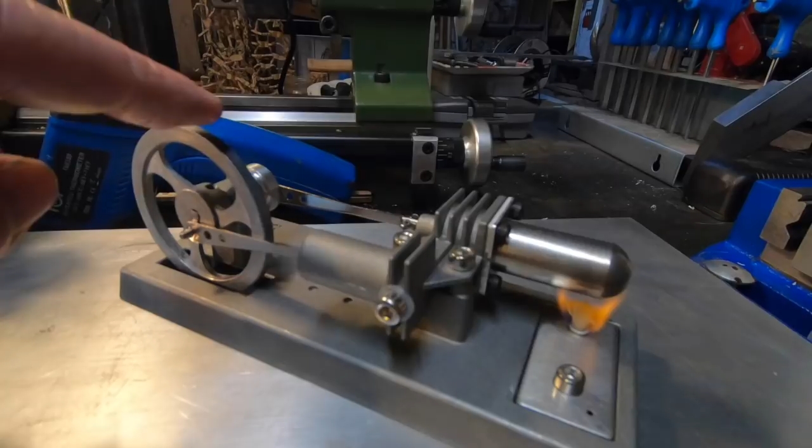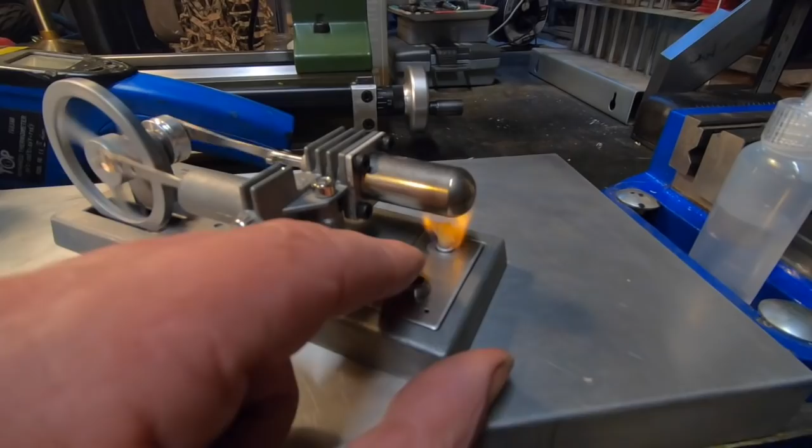Welcome back. This is a Chinese heat engine, or a Stirling engine. It's alive! It's alive! Oh, that's great! Named after a Scottish minister who tried to protect his congregation by building a safer engine than a steam engine.

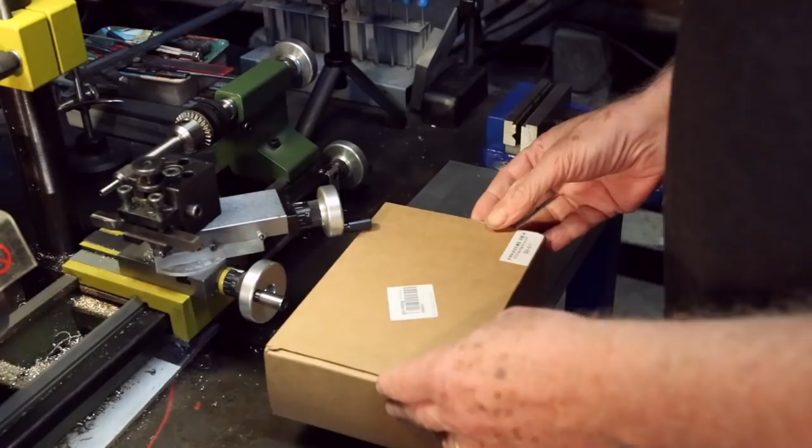Hi and welcome back. I've always wanted to build a mechanical model, a steam engine, but the Stuart models are very expensive, and I really don't feel that I've got the skill with my lathe and hand tools to actually produce a decent model. I'd end up buying two of them and probably just making one. But this looks pretty easy. This is a Stirling model engine from China and costs under £30, and is all cast and no machining is necessary. So I thought we'd build it.

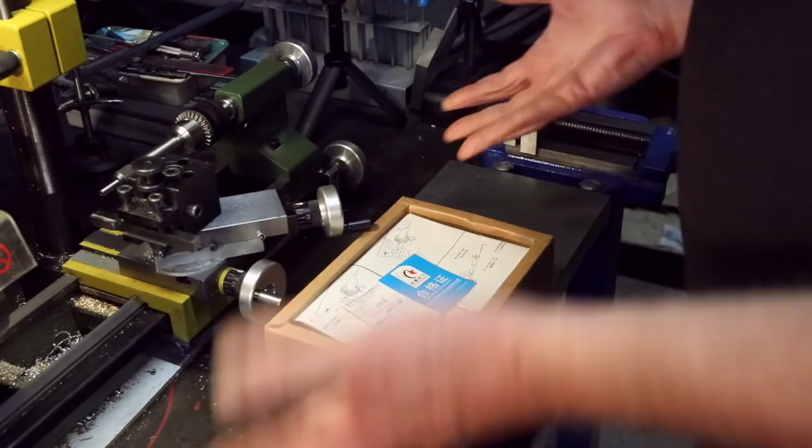Comes in a box, quality control, some pretty interesting instructions, and the parts.

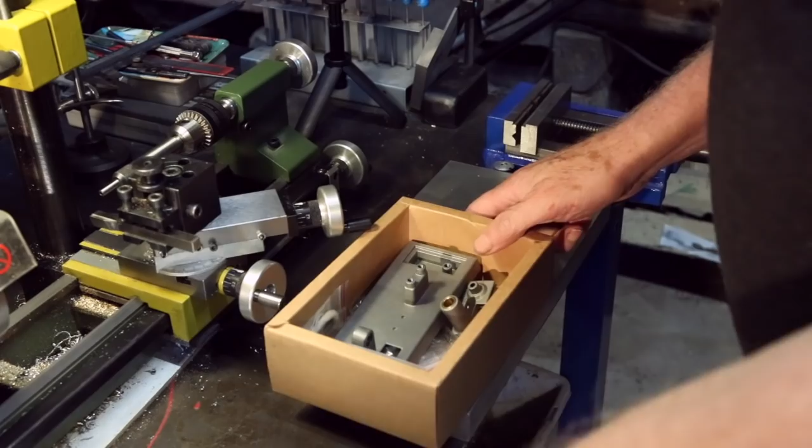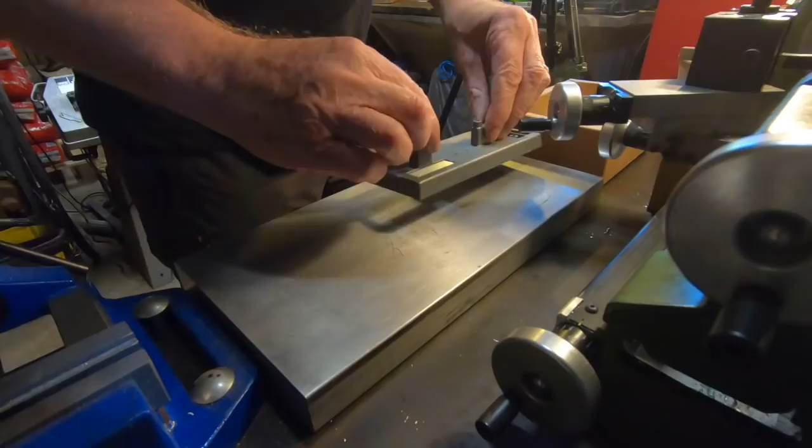Now, my first impression is these parts are really well made. These are castings, some kind of alloy. They feel a bit like cast iron, and they're really pretty straight. Flywheel.

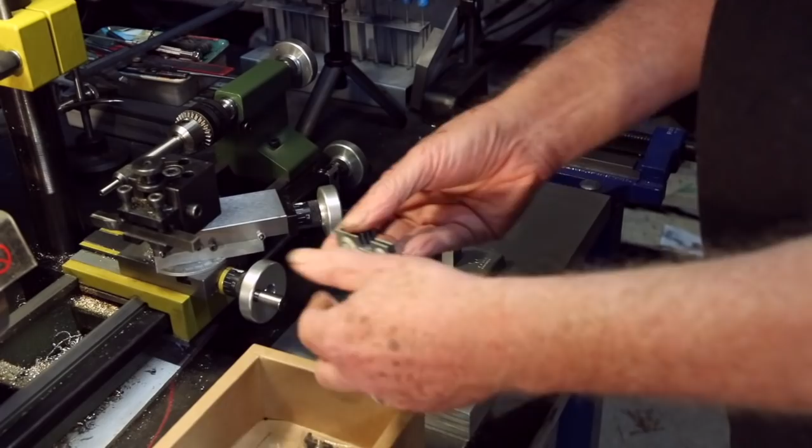A very nice cast cylinder. You can see there, somebody's put that together. It's drilled between. So this is a Stirling engine, so there's a hot side, and this is a heat sink for the second piston. So hot air expands, goes through, and then contracts, and hopefully we'll get a working engine.

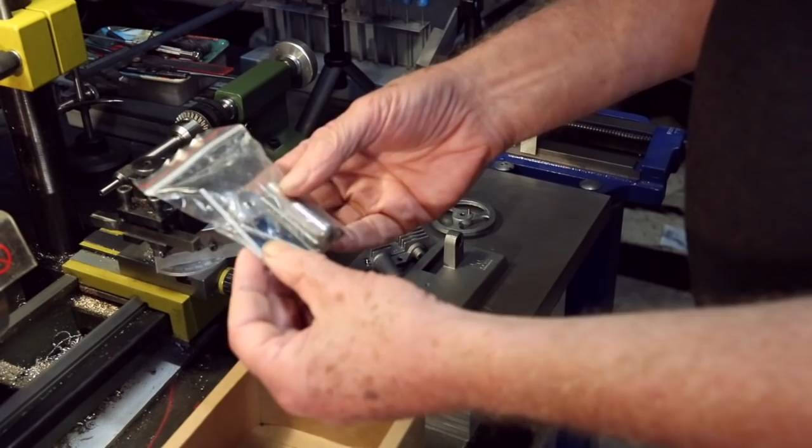A little container for the fuel when we get to that, and bags of bits. Whoa, all seem nicely made. Some Allen keys as well to put it together. Great.

This looks like the bearing. Good. A selection of Allen cap head screws. Good. This must be the piston, and it has a connecting rod in it. Yeah, it looks nicely made.

And what's this? Oh, a bag of spare parts. Excellent. And oh, one more thing that I hadn't originally noticed. Oh, look at that. That's a wick, some kind of silicone seal, and lots of little plastic spacers and gaskets. Very good.

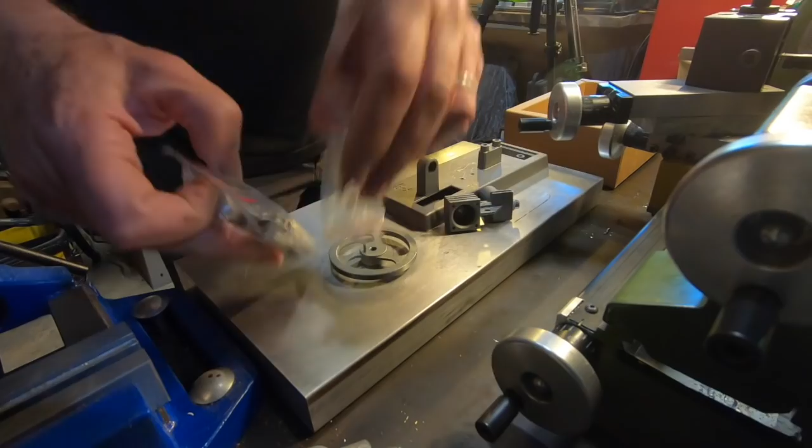So I think what I'll do is I'll put everything back in the box, and I guess we start with the base and the instructions, and we can sit down and build it together.

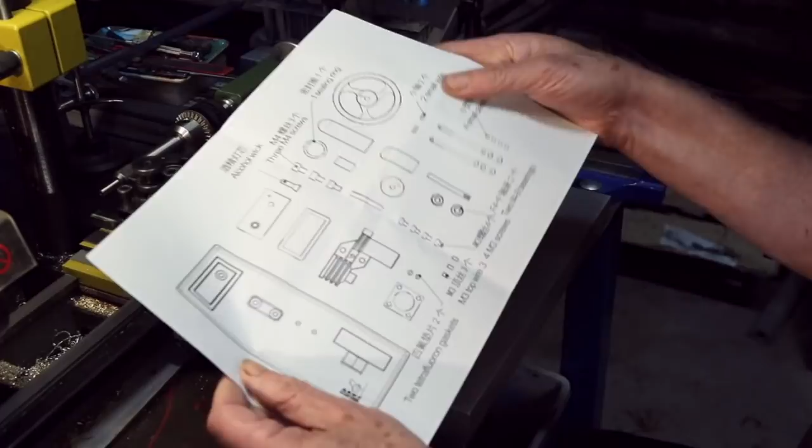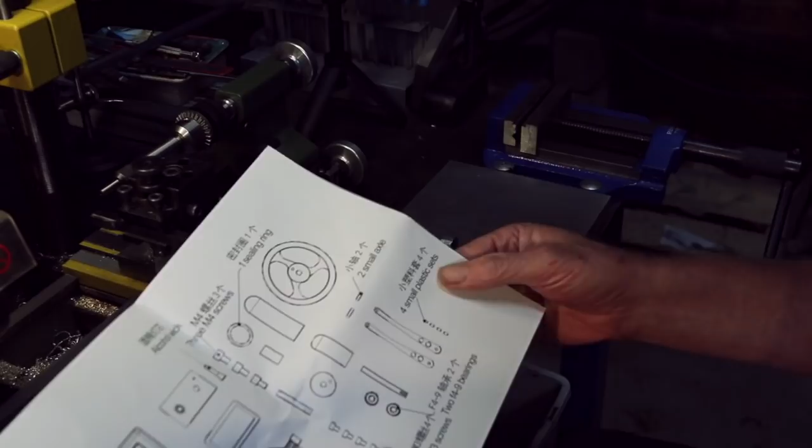So here's the parts list. 2 tetrafluoron gaskets - well, I think I saw things like that. A mystery part, M3 top wire 3, no idea what those are. 4 M3 screws, I can guess what they are. 2 F4-9 bearings, no idea. 4 small plastic sets, a small axle, a sealing ring. Must be the flywheel. Must be the cylinder and piston and connecting rod, an alcohol wick, yeah, we saw that, and the base.

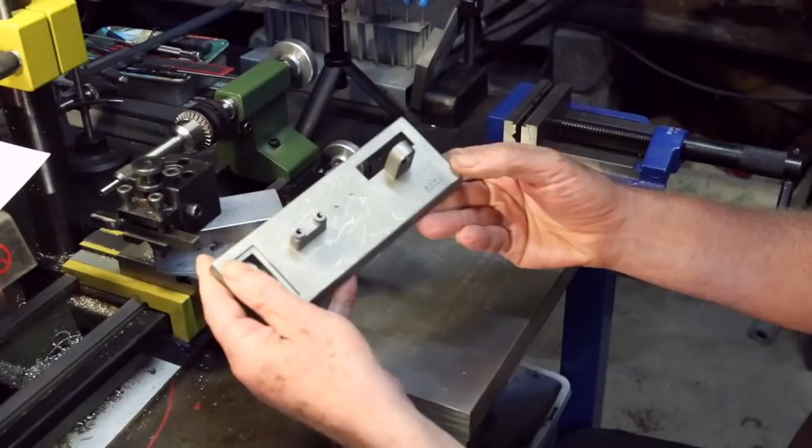So this whole thing is made by Star Power. Let me put my instructions up there, and you can see here it says Star Power, and there's a star and a crescent moon and a wing cast into this nicely made base.

I don't think I'm going to paint this. I quite like this kind of gunmetal grey finish. As I said, this is my surface plate.

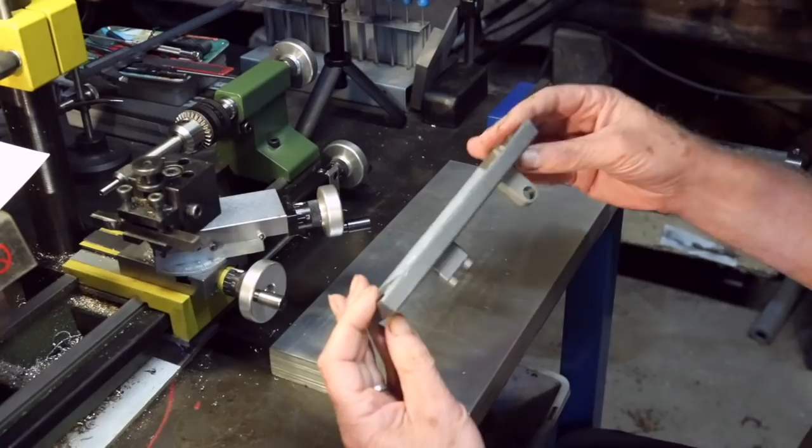It's not perfect. Maybe I'll give that a bit of a rub down. See if I can get that. It feels pretty good. It hasn't been, as I said, these castings haven't been machined. They look like they're just straight out of a cast, and that bearing surface has been reamed, and it's all been tapped and threaded. That one's not really in the center. See if that matters.

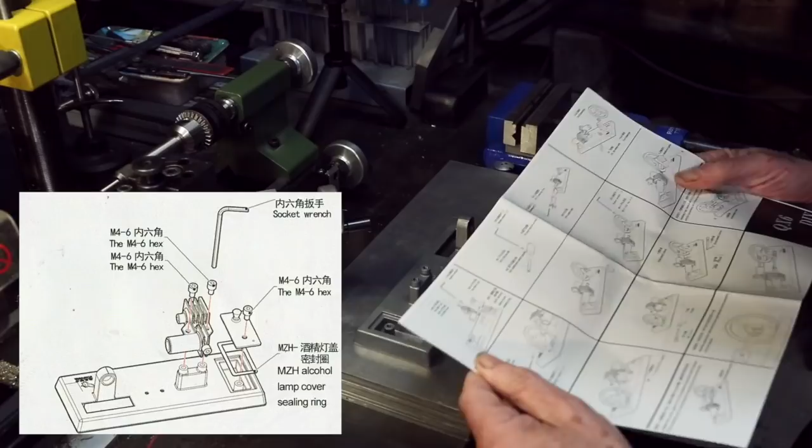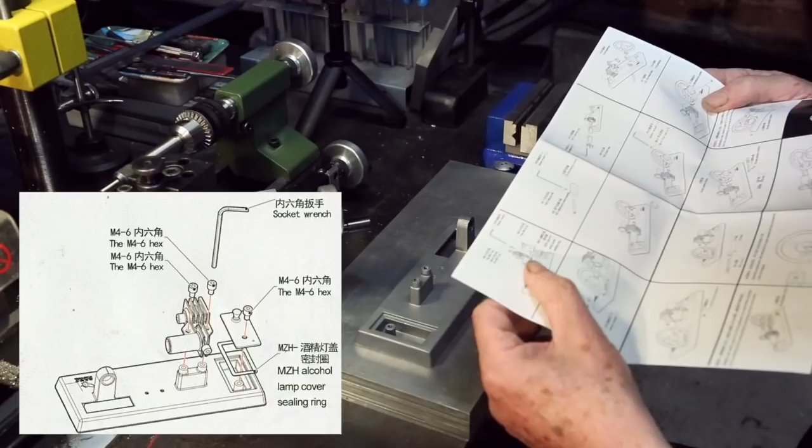All right, let's dig in and build it. Haha. Step one looks like you build the fuel tank for alcohol, and it looks like you put a seal in it, and the wick, and an M4 - it says M46 hex bolt. It'd be good if there was a picture of the finished thing. No, there isn't. Anyway, I think we can find these bits in here.

See what we have in this little bag. That really looks like the top of the fuel cover, and it has some plastic on the back. I wonder if - I think you're supposed to take it off. Okay, so that's interesting. So I think this is the top like this, and they've kind of polished it and put this protective blue film on to protect it. Wick, mounting screw, and a little air hole.

Okay, that's good. Now somewhere - oh yeah, I saw the wick and the fuel tank gasket. I guess let's take them out. Ooh, this looks like it could be quite tricky. The wick and a very thin gaskety thingy. Ooh, it's stuck to the plastic bag because it's silicone and it's sticky.

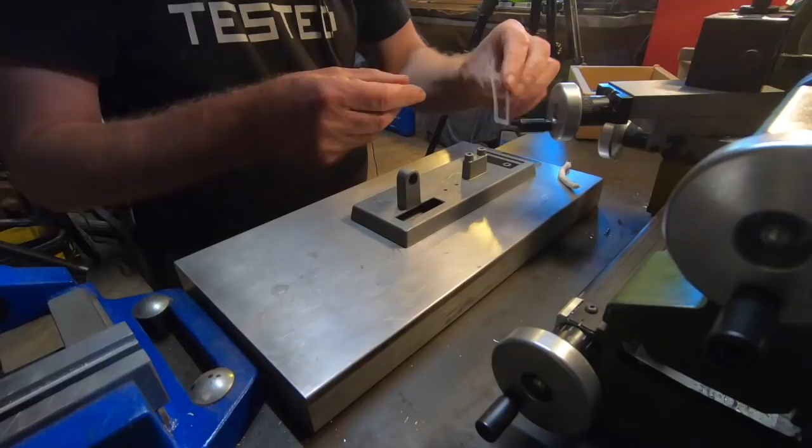How am I going to get this out? There, maybe that's it. Dun dun dun. Is it going to come out? But the thing is, if it comes out, is it going to throw all the other little silicone parts everywhere? I think the answer is yes. No, okay good. So there's a very thin silicone gasket, which it seems to imply goes in there.

This is the wick. So let me try and force it through there. No, I'm not doing so well with this. I've tried to make like a conical end. Oh yeah, there you go. Right, and the wick's going to go down there, and we need a screw.

Here's my bag of screws. I'm guessing, only guessing, that it's going to use a silver one.

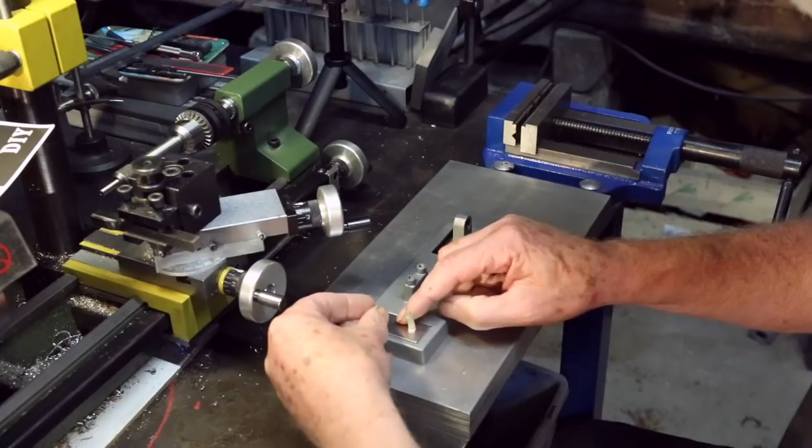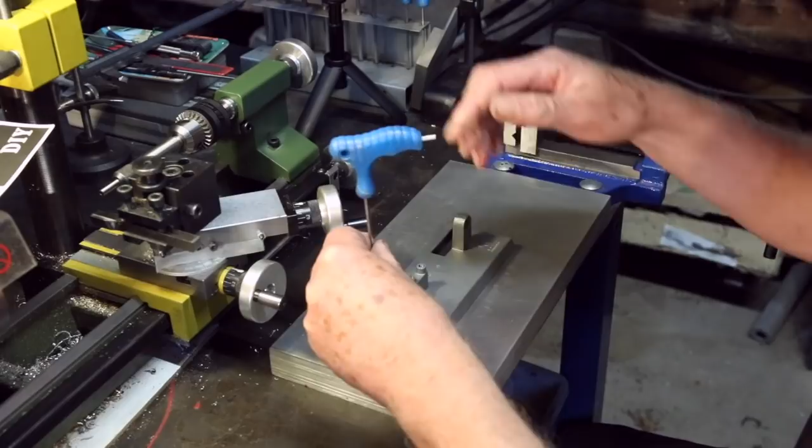We can try and see if it fits. Not sure. Okay, let me try with this one - yeah, that fits nicely, and just snug. I guess that completes the fuel tank. I guess you undo that to put more fuel in it. I'll leave this Allen key out.

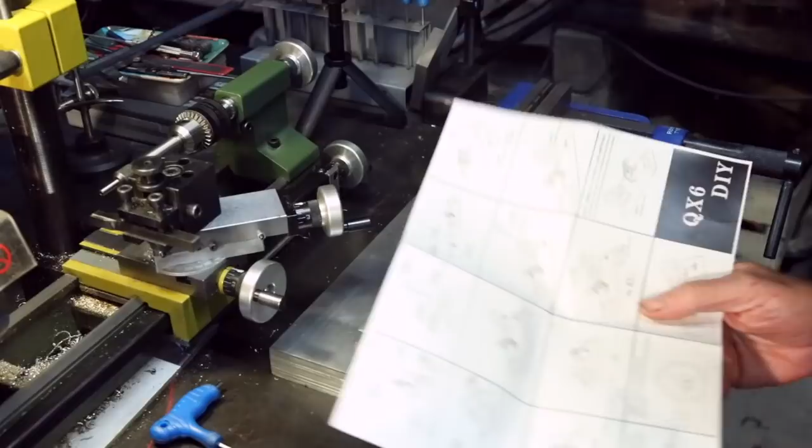Second step is to put the - oh, let's orientate this so it's the same as the drawing. So it's orientated like that.

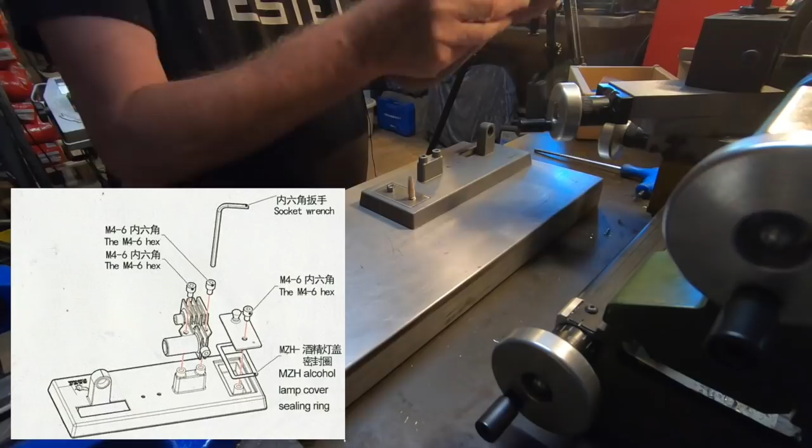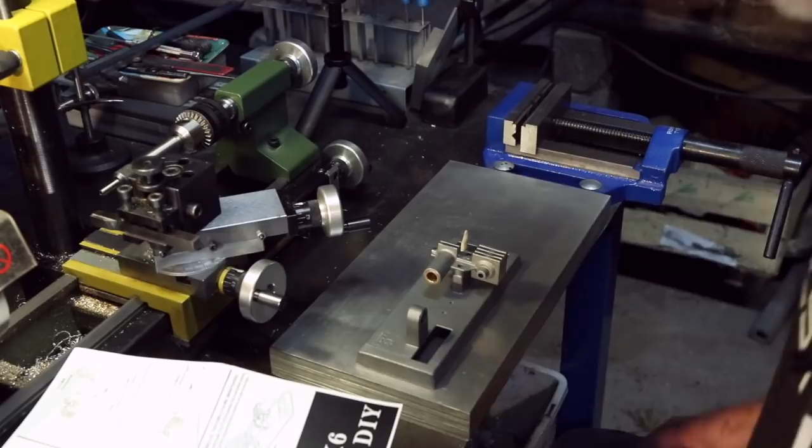Second step is to get the engine, the cylinders, and let's see, I'll show you the drawing. I'm doing this part. I guess it's like that, and it goes on like that. No, it goes on like that. Yeah, that's better.

And I wonder - oh look, there's two other silver screws. I wonder if they are the ones for here. Yeah, it seems to fit. That seems to be that size of thread.

Little bags, little bags, little bags. Oh okay. I guess it's a little fiddly, but that's okay. Come on, Simon. Come on, yeah. Well, the threads in the casting seem good. I'm just going to put them snug, you know. Ooh, so it won't fall over.

Well, I think that completes part one. Ta-da! Base, fuel tank, cylinders, whatever.

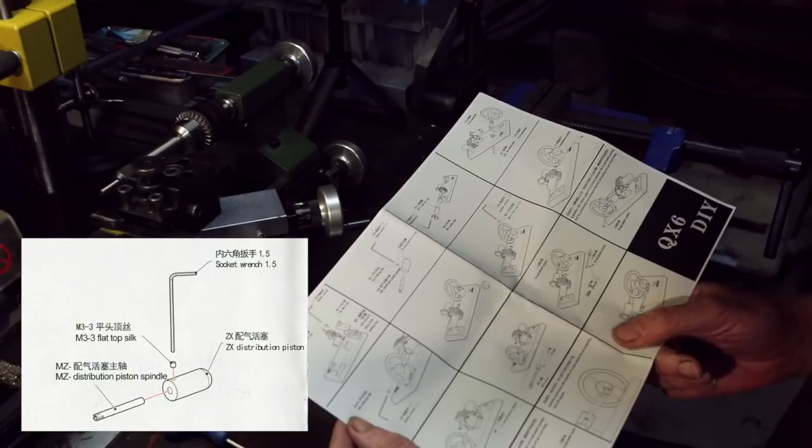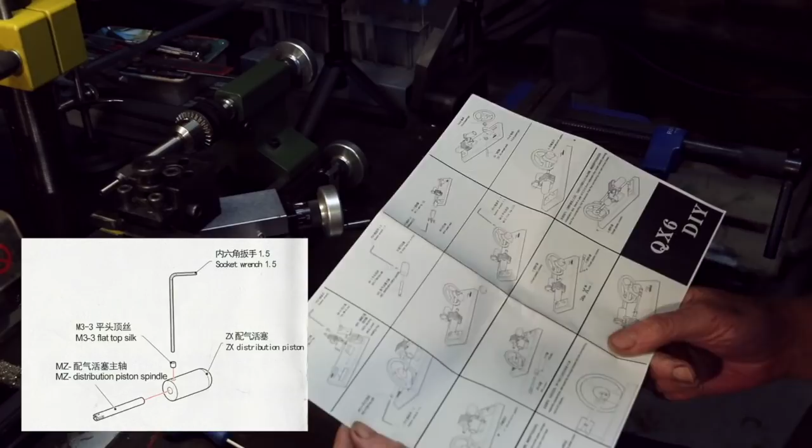Part two is - well, I have to find these parts. It looks like I need the ZX distribution piston, the MZ distribution piston spindle, an M3 flat top screw - I think it's like a grub screw - and a very small socket. All right, what have we got?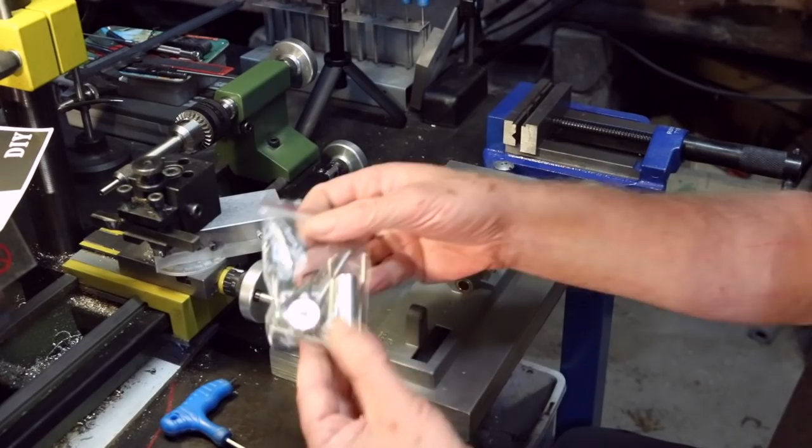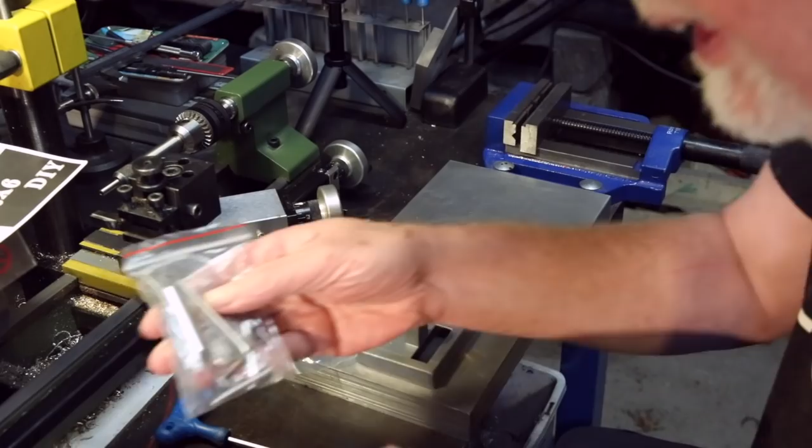Well, that's the cylinder. I wonder if it's this thing. Is that it? Because it really looks like in the drawing that it ends in a conical end, but I don't see anything like that in the kit. Oh man, so the drawing and the kit are different. Tell me something new.

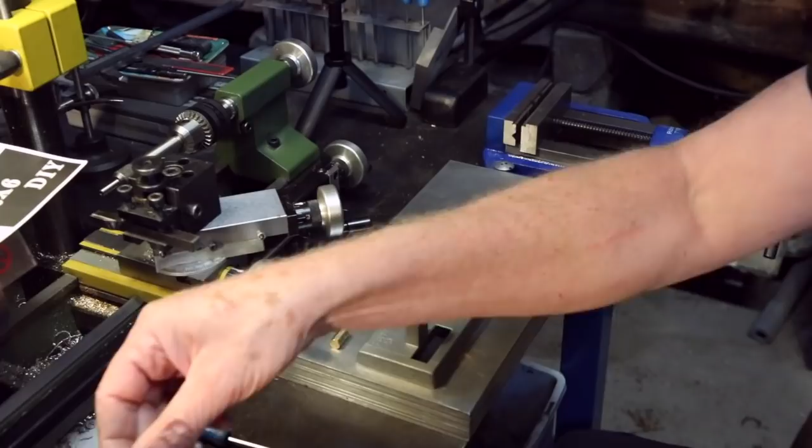So I'm now winging it. Is this the piston? Ah, no, no, Simon, you're wrong, that is not the piston. I think I've seen where I'm going wrong - I opened the cylinder, which we don't need. This is the cylinder in here. Ta-da! The piston is in the cylinder. Okay, ooh, that's nicely made. Okay, so I need that.

What else do I need? I need a connecting rod. Oh, I'm guessing that it's this. Oh yeah? So it's a connecting rod, and it seems to be slotted at the end with a hole drilled for a pin. And that looks like a threaded hole, and this doesn't have any flats on it, so it could go anywhere. Fair enough.

And we would need a small grub screw to go in the hole. Well, the only grub screws I see in the pack are in the box of spares, so we're already using our spares up. Bum, bum, bum. I'm going to have to tip these out because they're so small.

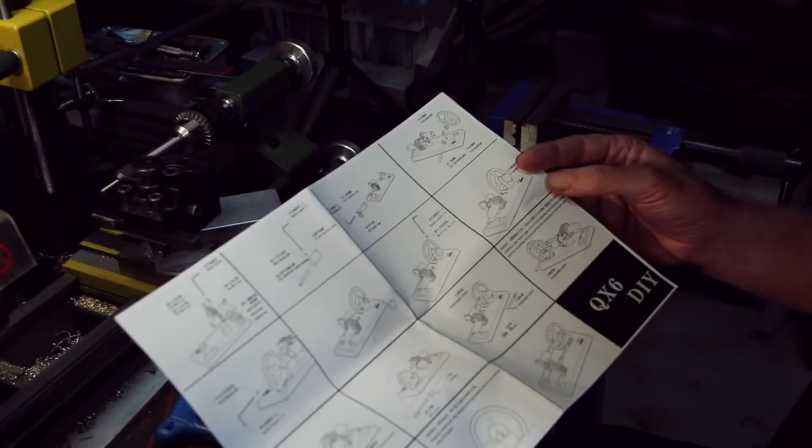Oh no, does that mean I have to use the tiny one? I don't know, I could look at the instructions. Yeah, it does, like in the picture, it does look like the tiny one. But can I see where the big one's used? No. But I don't like that it sticks out.

So let's dump the big one. Oh no, I have to get the tiny one out. Ba ba ba. Oh, so this is fun, but yeah, definitely you need to be good at working with

fiddly, really fiddly parts. So if you enjoy working with tiny stuff, like not much bigger than... oh man, you would have if you were building a kind of a watch. Well, actually, I'm sure a watch is even smaller, but it feels like watch size to me.

I'm just going to leave that one out for a second, just in case it's going to roll off. Okay, they're so small they kind of stick. Oh, how am I going to get that in there? Oh man. Don't drop it, don't drop it. If I drop this, it's basically gone forever.

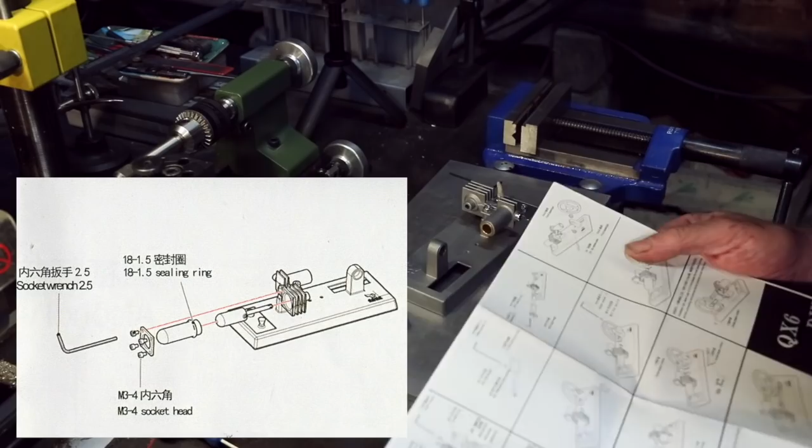Okay, I need a socket wrench, some kind of sealing ring gasket, and some kind of flange, and the cylinder. There's the cylinder. I'm assuming that that's the flange, and I'm assuming those are the screws for it.

And I did see the, yeah, here's the gasket they talk about. There's that big one, that's good. But it's sticky. Ugh, okay.

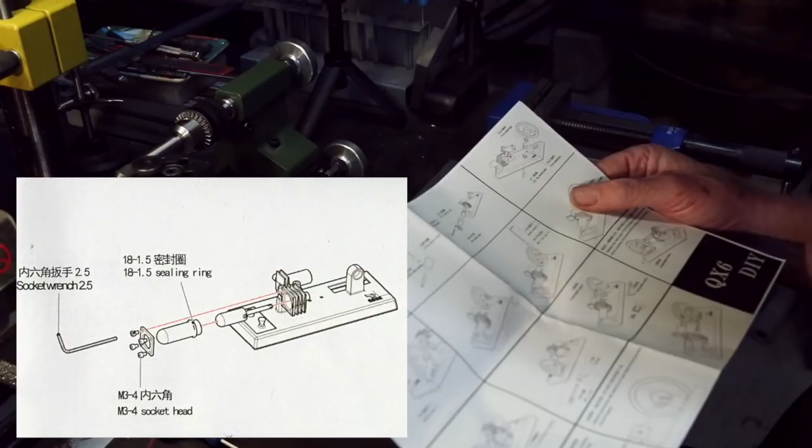Back to the instructions. What do I have to do? Oh, it goes, hang on. It goes on, you have to turn this around. It goes on here. Very good.

Alrighty. It looks like, alright, that the piston goes in there. We don't know the orientation of it.

That cylinder goes on top with some kind of gasket, and then this is the flange. It's the parts. Oh, it's another shiny part with protective seal on it. Oh yeah, nice.

Ugh, the back of it is a bit dirty. This doesn't matter. Yeah, so this is a nicely made part, and I'm guessing it goes on like so. Oh yeah, and it lines up. I'll have to get these in there.

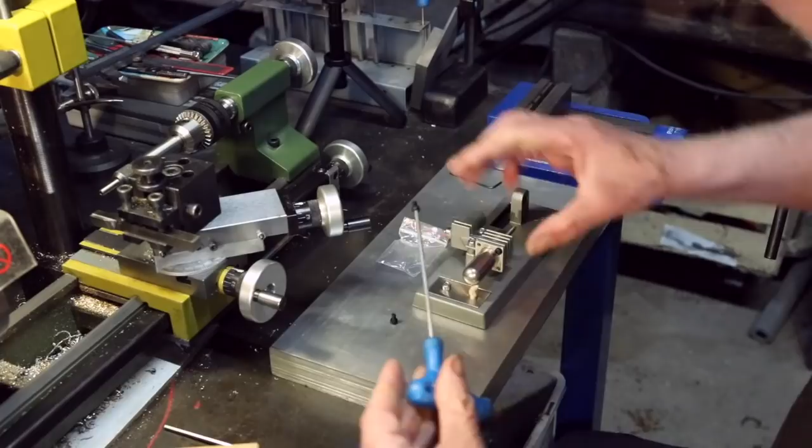So I'm just starting them. This is relatively easy so far. As I said, I think the only difficulty could be if you've got really giant hands. I think some of the parts are a bit small.

So this flange squeezes the gasket to this kind of heatsink bit. And the last one, so squeeze. I'm not going to over tighten them, I'm just going to—I think all that it has to be is airtight. I mean, it's not taking any pressure in here. Okay, that's my best guess.

Oh, and I've used up a whole bag. Yay! All right, so let's assess where we got. The wick is way too big. We've now mounted this cylinder with a piston inside it, which seems to slide in and out. It will obviously need lubrication. There's a hole in it, and there's another one. Good, well, I think we're doing quite well.

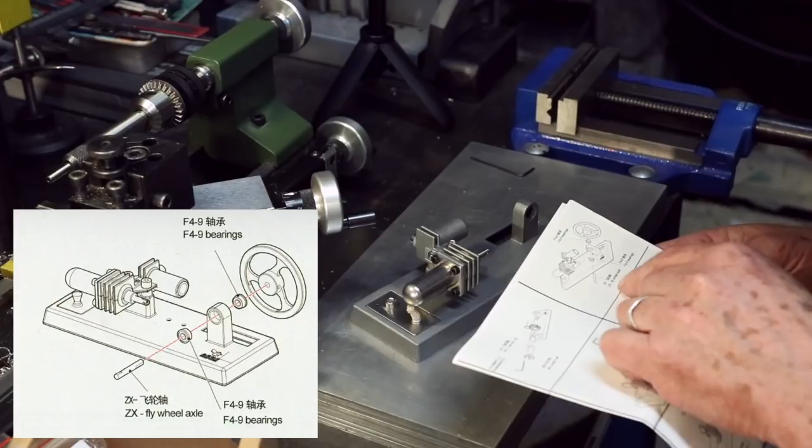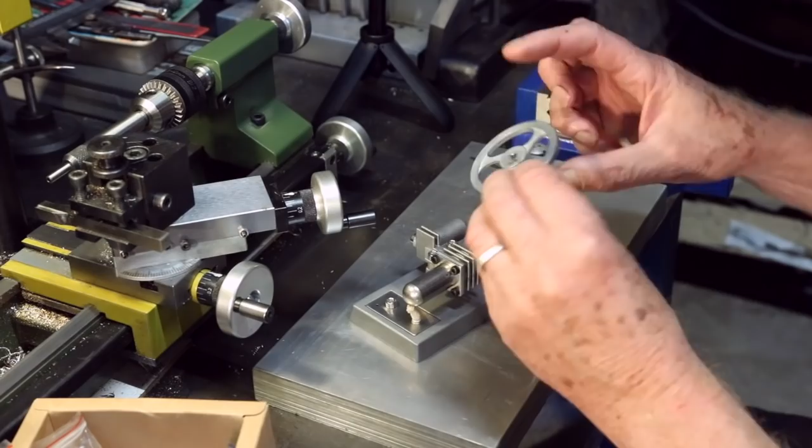So moving on to part 4, and that is flywheel, bearings, and flywheel axle. Okay, well, flywheel's pretty easy to identify, but there's a pin comes out one side. Okay, good.

And I believe that differently from the drawing, which shows bearings and a flywheel axle, I think they've kind of put it together for us. Oh no, no, I get it. They have, they've kind of slid it all together. So, that's right, this, oh, these are really nice.

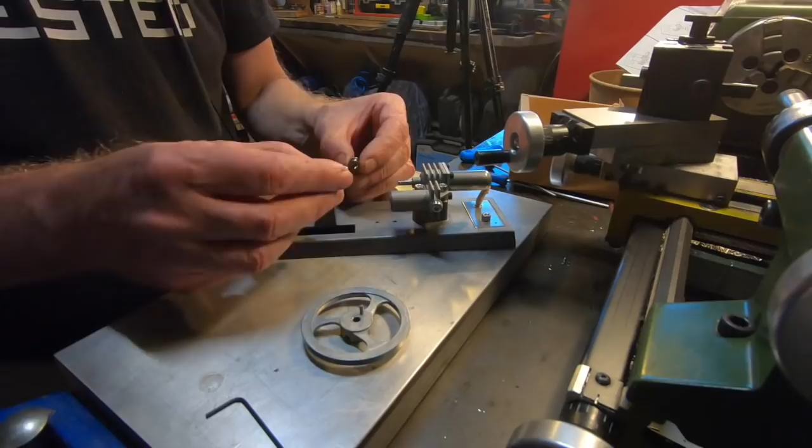These are little bearings. Excellent. So I'm guessing you put a bearing in here. Ooh, let's see what kind of fit this is. Feels like it's going to be really great.

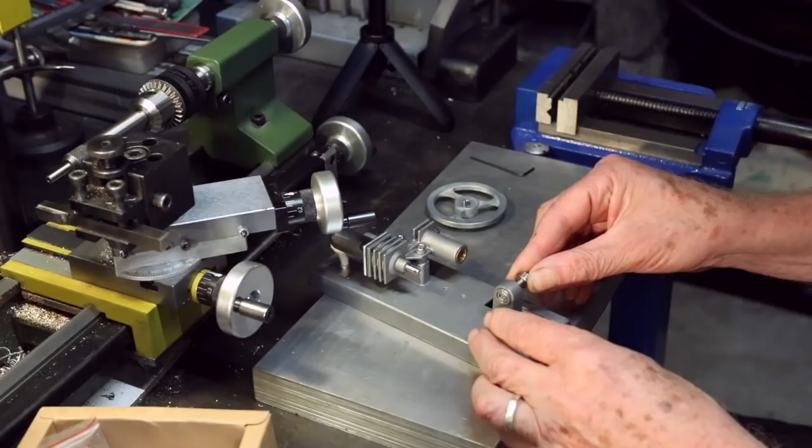I'm just struggling because it's so small. Let me put it on its side. I can tell that the fit is pretty well going to be perfect if only I can get it in there. Yeah, that's a really nice push fit. Oh. All right, so whoever made this and machined this did a good job.

Bearings work great and they have a perfect interference fit into the main flywheel housing, and they rotate freely. Good.

And the flywheel, so on this main crank axle there are flats, and they are 90 degrees apart. That makes sense. You'd think there would be a washer or something between there?

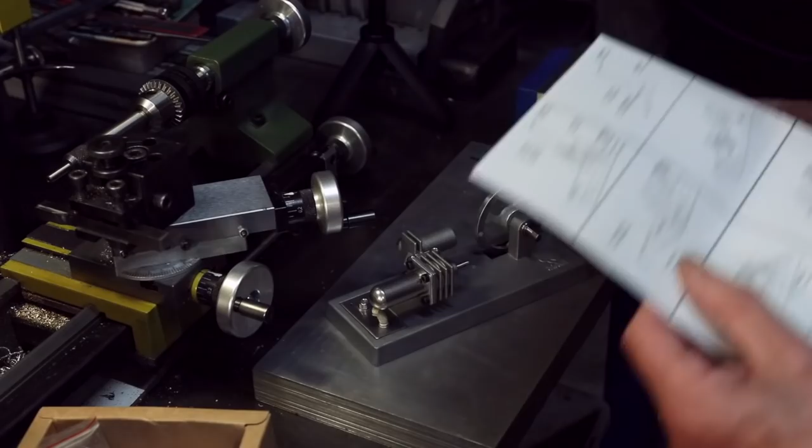No? All right, okay, now I have to... I get to...

I'm assuming that I get to use that long grub screw this time. Oh, it's so small.

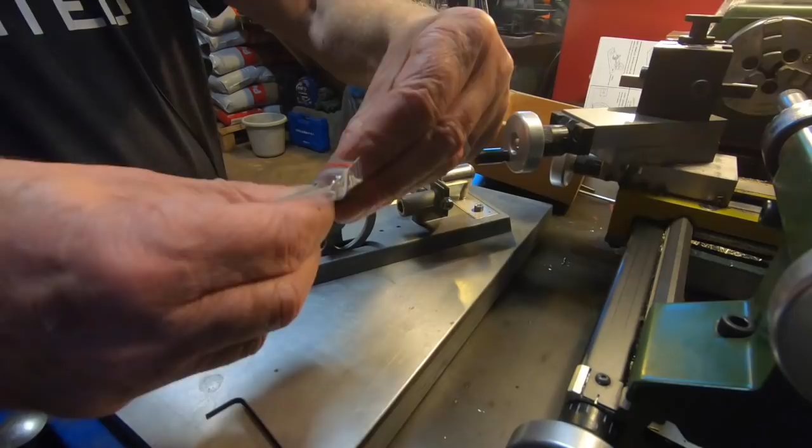I'm going to bravely tip it out onto my workbench. It's so small it won't even come out. Got it. Oh man, tiny. I mean, look at that. All right.

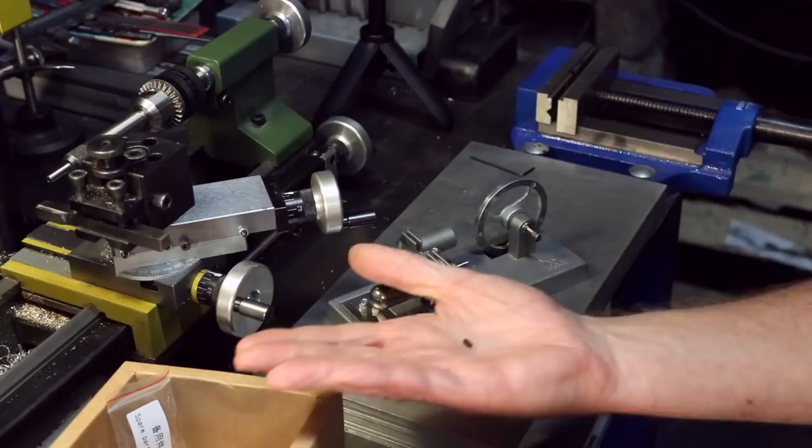And I have to put it in there. I guess I need to know what is the Allen key for it. That one. Oh, that helps. If you put the grub screw on the Allen key, I'm just going to put that in, even though I don't know what I'm doing. That really helps, it will actually hold on to it.

Again, I'm just putting everything, when I'm tightening things up, I'm just doing it what I call snug. So as soon as it stops, I'm pretty done. So again, I don't know what I'm doing really. I left a bit protruding from that side and a bit protruding from that side.

Kind of got the feeling that this is going to have to line up with that. I don't think that's right. I think I need it all sticking out there, and that's flush with that. I think that looks like it makes more sense.

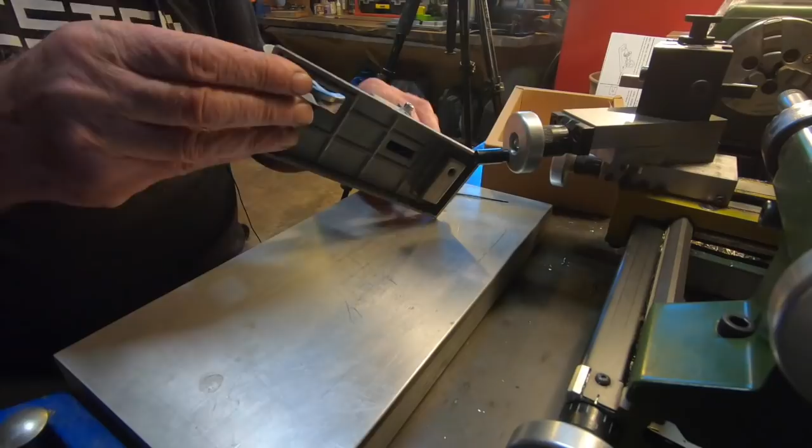Let me explain what I did. I made the axle flush-ish with the bearing, with the flywheel at that side, and made it stick out all this side, because I'm guessing I'm going to have to connect these two together. It still doesn't look like it's going to reach.

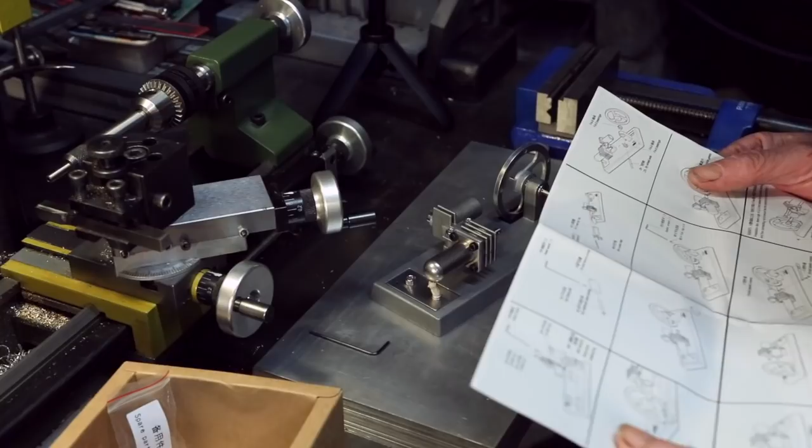Anyway, that spins nicely. Right. Step 1, 2, 3, 4, 5. Step 6. Aha. Put on an eccentric on the other side. No, so again, this, as I said, it's milled with a flat.

And I can see the two pins are 90 degrees apart.

And now I'm going to try and get the other grub screw out of the tiny bag. I'm telling you, getting the things out of the bag so far has been the hardest thing.

The instructions, although not super clear, because you kind of roughly know what you're building, and there's a picture, I think they're fine. I mean, I should imagine this whole thing will need tweaking. I mean, it's not talking about, see, there's play on that, so...

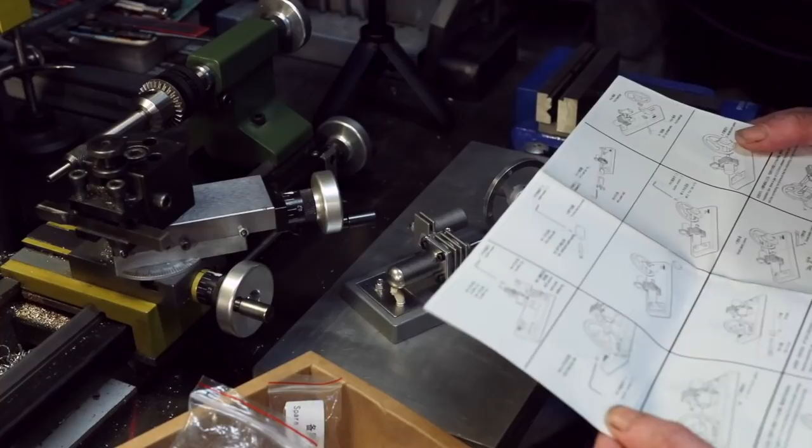Ooh, tetrafluoron gaskets, I think. And it says 2 of them. But does it mean 1 on either side, or 2 on each side? And I've got the feeling that these are the dreadfully small, tiny ones. Oh no, no, God. Look, there's a whole selection of different ones.

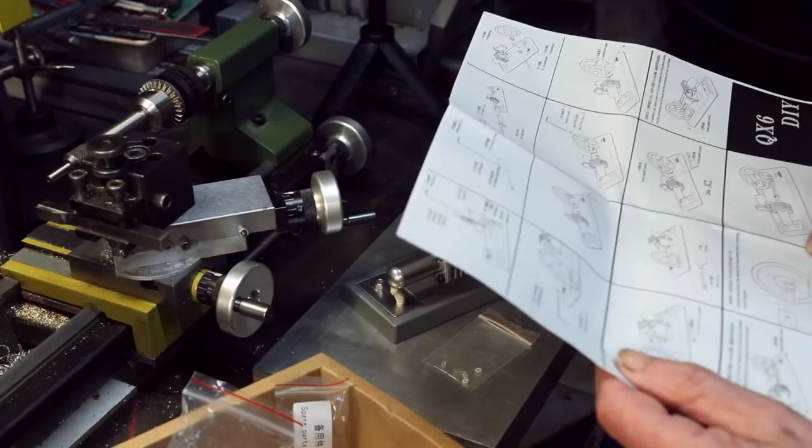I mean, they really look the same. So there's like long ones, medium ones, and white ones. For some reason, oh, this is going to be a disaster. For some reason, and this is just me guessing here, folks, I'm going to use the long ones.

Oh no, I think I'm wrong. I think those are locking ones. I think it's the white ones. What's the best way to do this? I don't think there is a best way to do it.

I bet you can't even see these. Look at these parts. Do not drop it. Do not. I did, I dropped it. Do not drop it again.

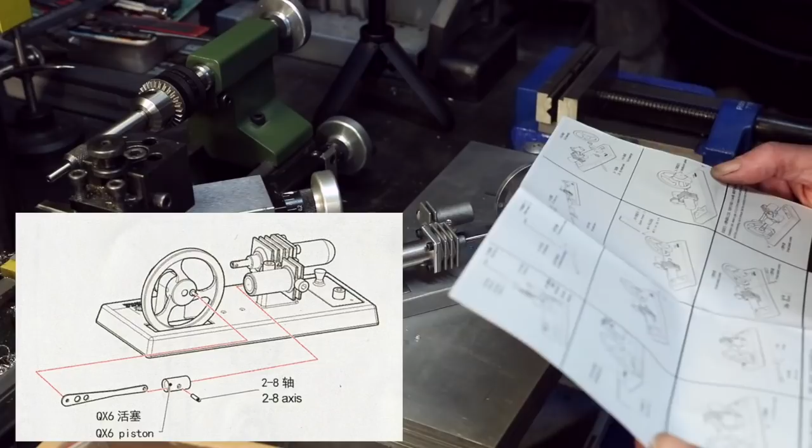Well, let's look at the next step. Yeah. Okay, so this is like... ooh, this looks a bit fiddly.

This is like this part. Oh, and it's all going to roll on the floor. All right.

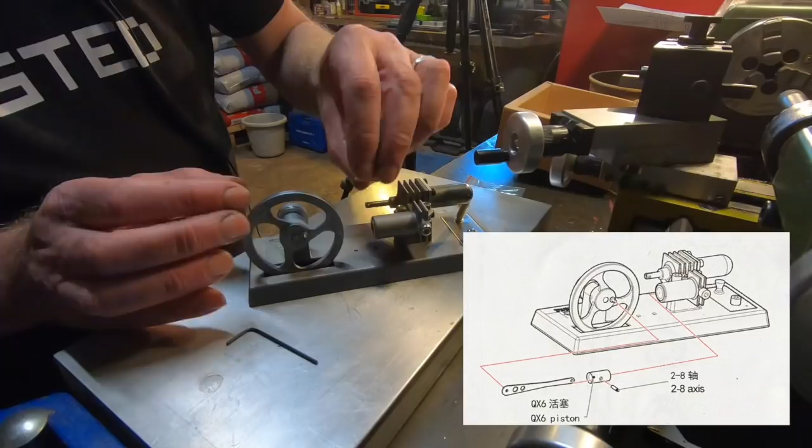No, I don't understand. That's not the part. That's not the part that I was thinking I was building. Oh, it is. All right.

I take one of these cranks, and the narrow end goes in here, and I have to get that. Oh man, I have to get this through it.

Wow. I have no idea how to do this. I'm just like, as you can see, I'm just like, oh, guessing.

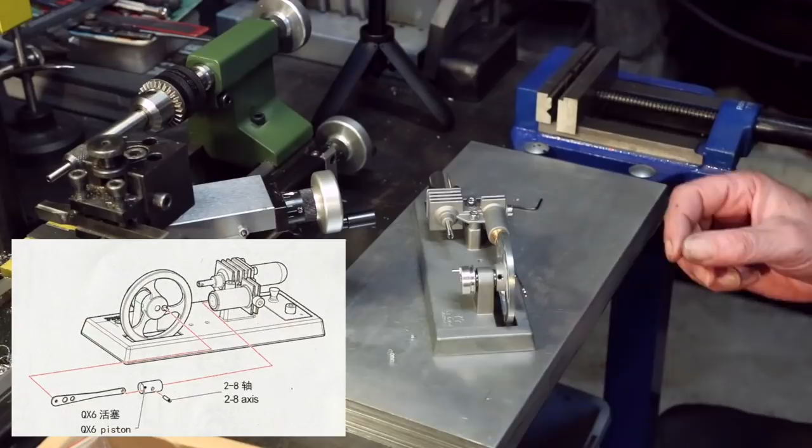Okay, and that, I'm assuming, goes — that this is a piston which goes in this cylinder. Right, and the end of it goes on this crank.

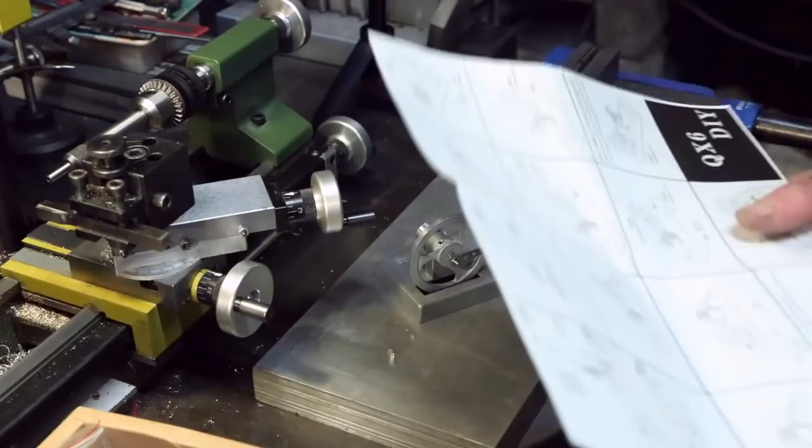Ooh, it's almost beginning to look like an engine. Look at that. And how do you fix this onto the crank?

Stay with one of these small plastic covers. Okay. I mean, I can't even show you the part, but it's like a little clear plastic sleeve.

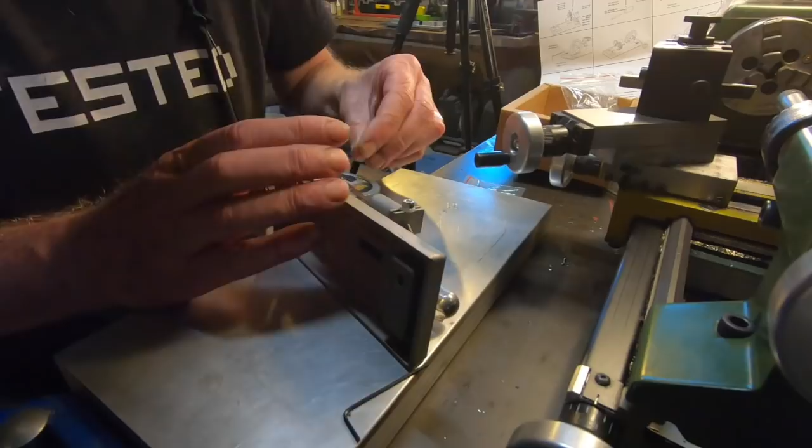Oh man, that somehow I have to get over this crank pin. I can't even tell which is the open end, like that. No, I didn't go on though. Oh yeah.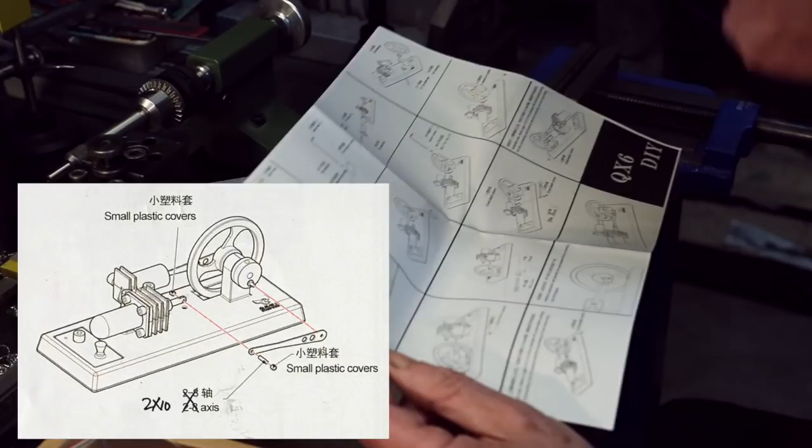Okay, next step. Other.

Oh, this is going to be really tricky. But I guess I see the principle. What we're going to do is put this on here and in here, but putting this in here involves finding the crank pin, or a pin, not a crank pin, just a pin.

And using the plastic covers. So it's like that, and like that. So there's a pin that goes on there. And somehow I have to get these plastic covers or locking bits on here.

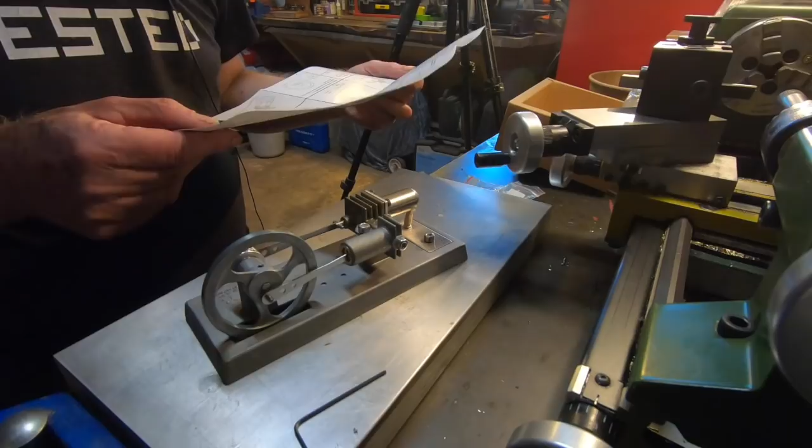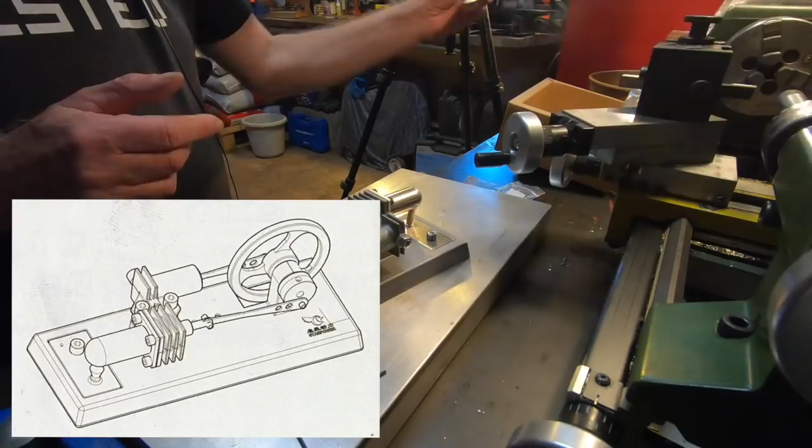Assembly requirement: after assembly, the angle between the two connecting rods is 90 degrees. Yeah. Well, that... without lubrication, looks like we're done.

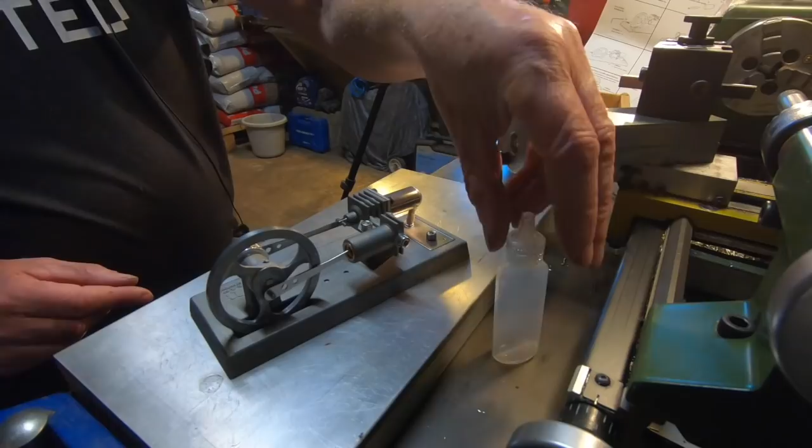So left over is a bag of bits, an empty bag, some tools and no parts. Ooh, a grub screw, an empty bag, another empty bag, a tool, and an empty bottle for the alcohol, I'm guessing. That doesn't stand up.

I guess in part 3 we will see if it runs.

Well, welcome back. This is the finished engine, built just as the parts. My observations are it's really well built. The only difficulty was putting on these little locking plastic bits.

And here's the other thing that I don't like: this is floating and it's kind of rubbing against the flywheel. I've got the feeling it would be better to have put spacers in this piston on that pin to hold it equidistant, but that sounds really fiddly, so I'm not going to do that.

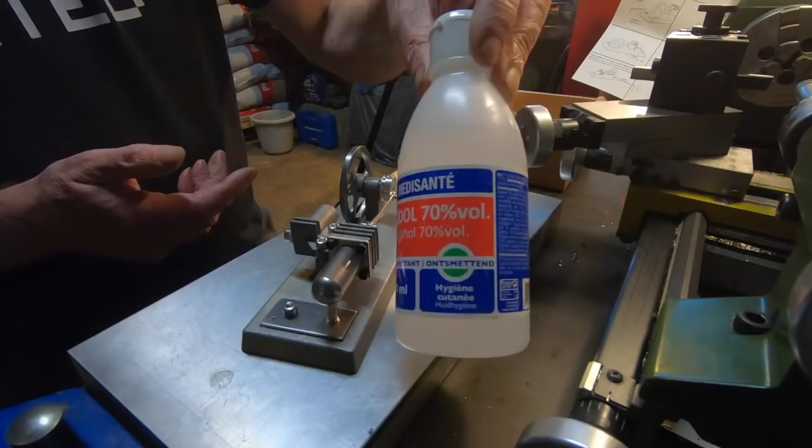So let's give it a try. So I'm taking off the fuel tank. Now for fuel, I couldn't find anything, so my wife has 70% kind of medicinal rubbing alcohol. Good on her.

And I'll put some in my bottle. Lots. And I'll close the lid and put that away. It smells like alcohol.

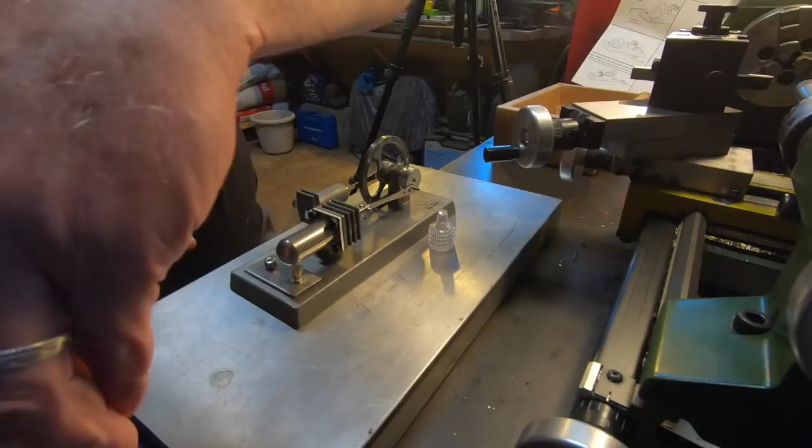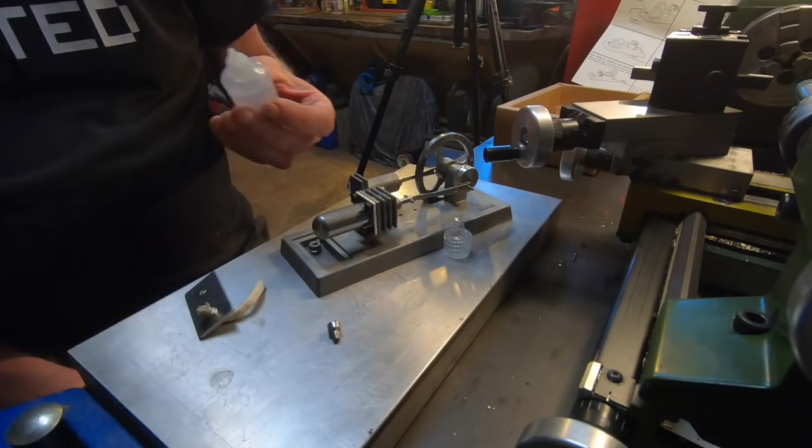And that doesn't stand up, that's quite annoying, it doesn't stand up. So I'll put it in my vise. Take off the lid. The gasket seems to stay with the lid, and fill up the tank with alcohol. Looks like 3/4 full.

And put the wick in the alcohol. And the gasket just seems to work. And then put this Allen screw back. Hopefully it's a bit cockeyed there. And then hopefully this will give time for the alcohol to soak up the wick.

Okay, that's snug and a bit more. I guess I don't want flames leaping out. And as I said at the beginning when I was building it, there's a little vent hole there, and I trimmed the wick.

And I think I'm just going to move my lathe out of the way. I guess I don't want flames leaping over my mini lathe. I'm just going to wind the lathe back into the safe position. It's probably safe.

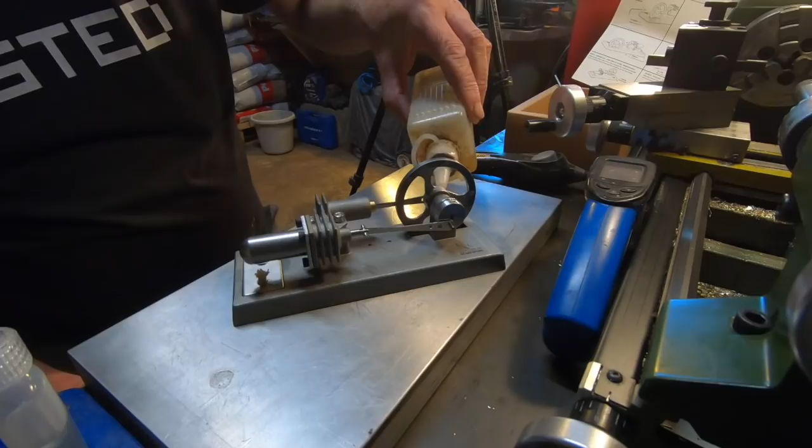I'm back with a lighter, an infrared thermometer, and an oil can. So let's put the tiniest drop. Oh, you see, that was a big drop. The tiniest drop of oil on anything that moves. Oh, this isn't a precision oiler.

Yeah. And let's light it. Oh yeah. There's definitely flames.

And so the flame is heating up this metal cylinder. I'm going to pick up the camera, and hang on folks, and you can see now that it's getting hot.

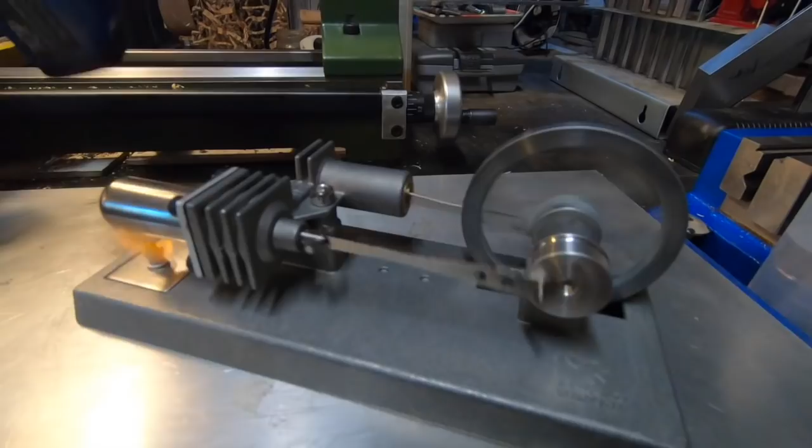And so let's just see, the temperature on here is 303 Fahrenheit, and the temperature on here is 70. So there's a heat difference between the hot bulb and the cold bulb. Yeah, I'm very pleased with that. Seems to run really well. And this is a Chinese model Stirling engine, all cast ready for you to build.